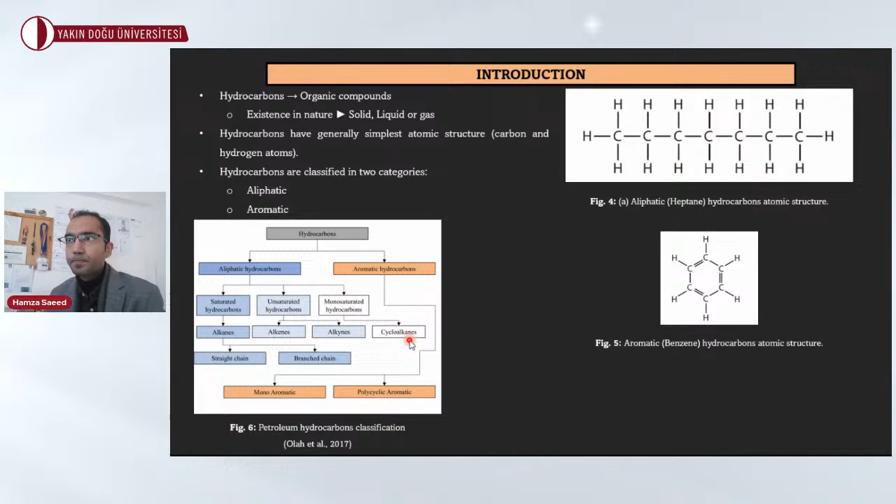So for example, if the clay structure is dispersed, it is converted to the flocculated structure, and also if the clay is in flocculation, it can be converted into a dispersed state. So this is how the hydrocarbons can affect the structure of the, or I should say, the clay matrix of

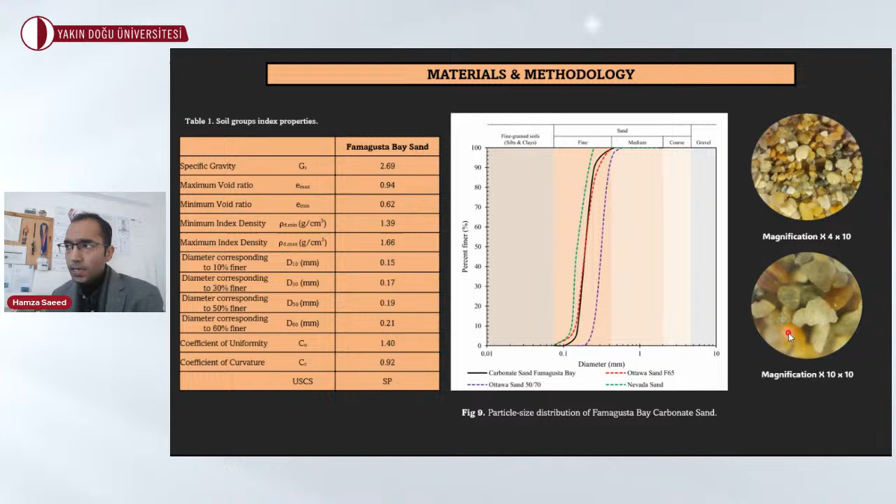occur. So coming towards the materials and the methodology of our experimental investigation, we collected our soil samples from the Famagusta Bay. So here is the particle size distribution curve of the carbonate sand of Famagusta Bay. So the sand has approximately from 0.4 to 0.6 grams in each gram of the sand as a carbonate content. And here is the magnification of the sand particles we have taken from the Famagusta Bay. As we can see, quite a wide range of particle shapes are present in the matrix.

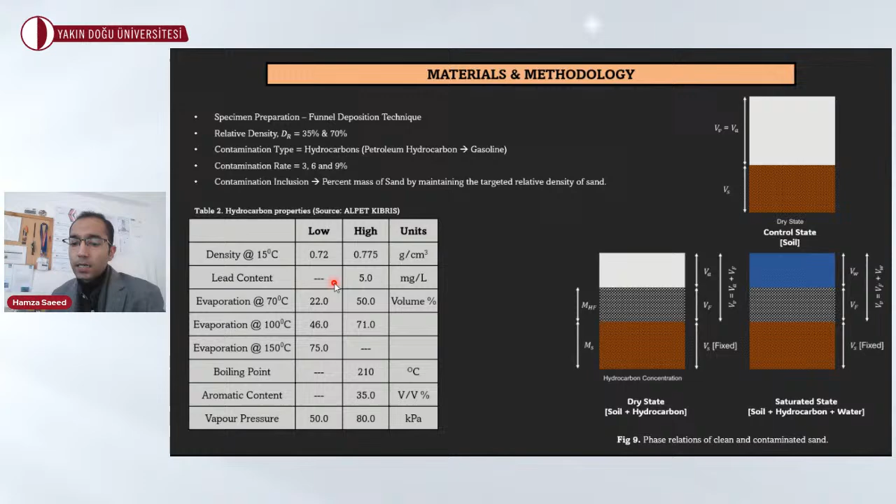So we prepared our specimens in terms of the funnel deposition technique, and we reconstituted our specimens at 35 and 70% relative densities. And we have added the contamination as the petroleum hydrocarbon, which is classified as gasoline, at 3, 6, and 9%. So we have artificially contaminated our carbonate sand, and we have added it in such a way that the targeted relative density is not changed, as we can see in these phase relations of the clean and contaminated sand. And here are the hydrocarbon properties which we have utilized and contaminated our sand with.

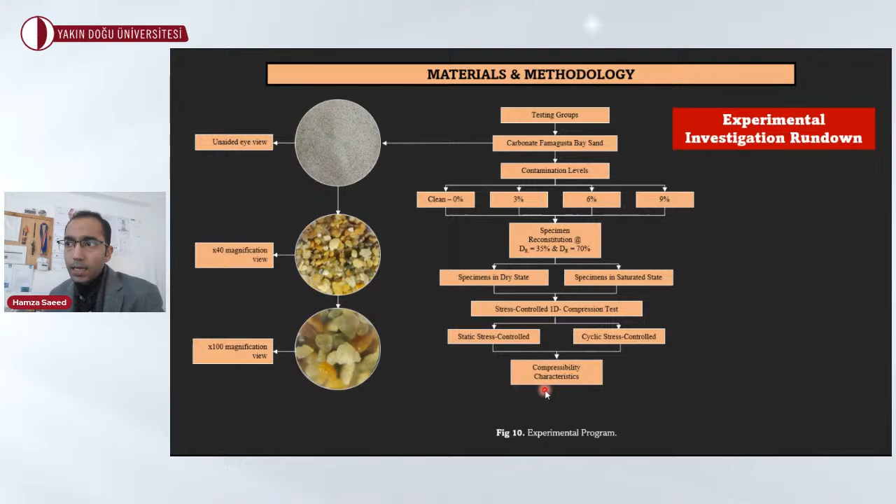So here is the experimental investigation rundown. The contamination levels were set as 3, 6, and 9%. And we tested our specimens in dry and saturated state. The point of focus of this presentation will be the one-dimensional compression test under stress-controlled conditions. We applied static and cyclic loading as well. And at the end, I am going to discuss the compressibility characteristics of this experimental investigation.

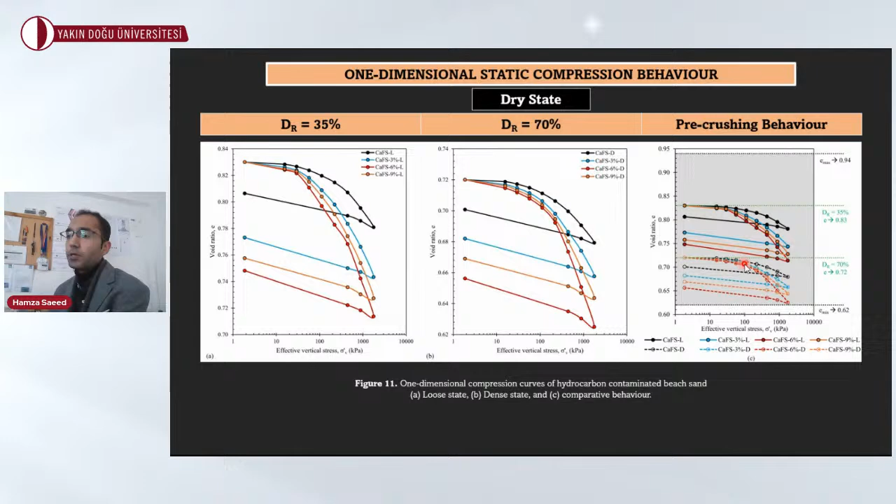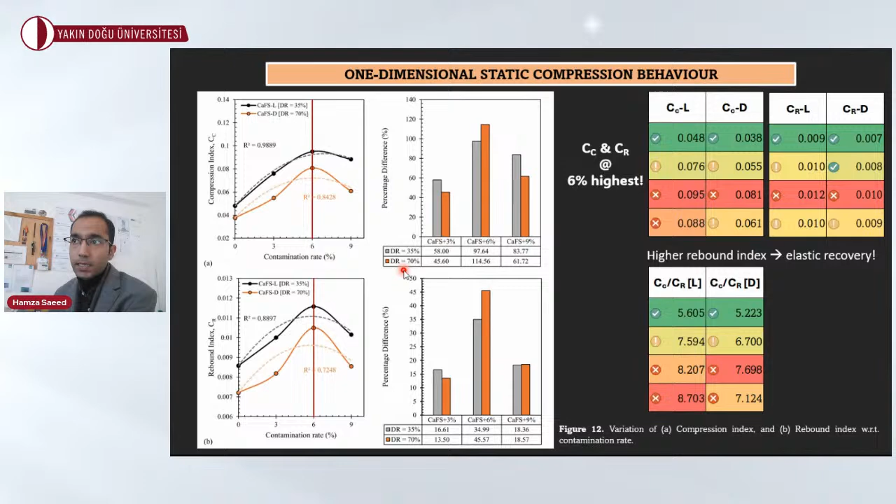So in this case, we can see that at the highest contamination rate at 6%, approximately 98% increase in the compression index was observed. Similarly, 114% was observed in the relative density of 70% in comparison to the clean sand over here.

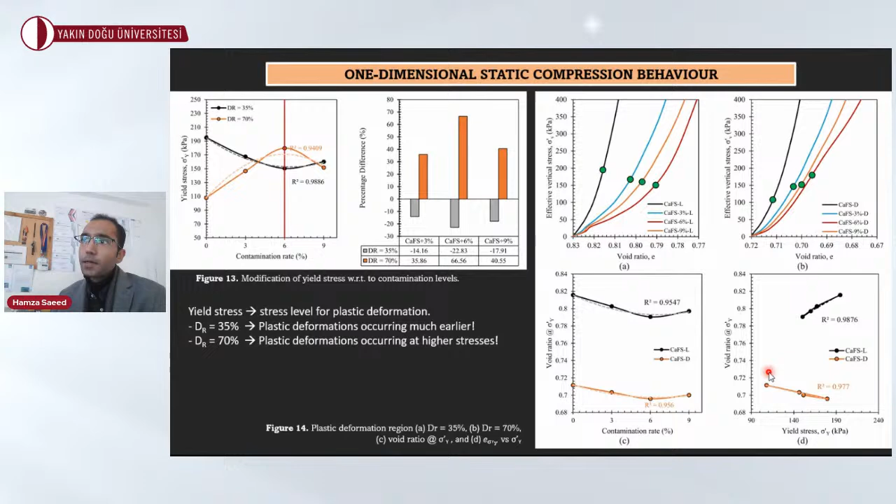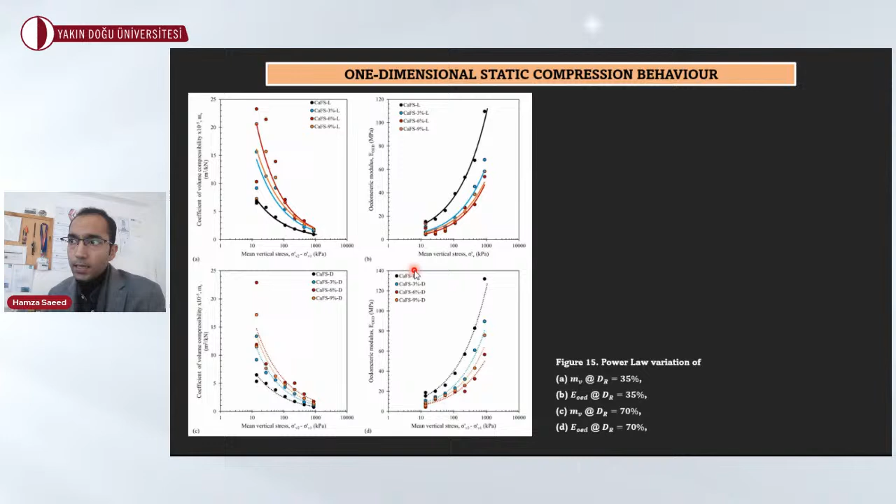And we can see that in comparison, no matter what the state of the soil is, either loose or dense, the 6% contamination rate yielded less stiff soil. In all the cases, it presents a power law variation for both the volume compressibility coefficient and the oedometric modulus. So here are the results for the saturated state, and a similar type of behavior is observed. It means that behavior is generally applicable for the 9% contamination rate, that it will in fact improve the compressibility characteristics a little bit.

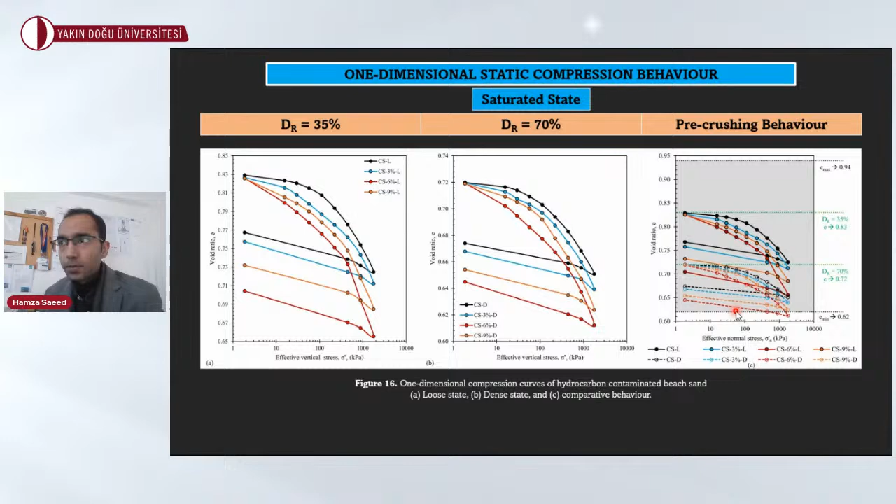But looking at the compression index, there is not much difference between the Cc values of the 6% and the 9%. Again, this is in the range of the index densities. That means the pre-crushing behavior was not observed before and after the test. Similar variations are observed, but in this case, the compression index values have significantly decreased compared with the dry state of the specimens tested.

Nevertheless, in the previous cases, our compression index for the 6% was much higher as compared to the saturated state. For example, in this case, we observed a 35% increase in the compression index as compared to the clean sand. Similarly, for the dense state, a much lower increase in the compression index is observed in comparison with the dry state. So it means that in the dry state, the contaminations are more actively playing their role.

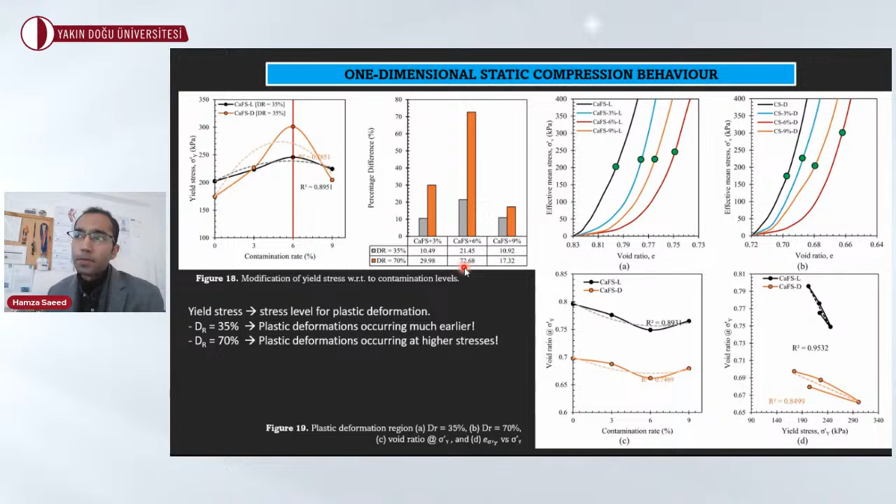Again, similar observations are recorded for the yield stress. If we look into the void ratios at the yield stress points, the plastic deformations are occurring much earlier in comparison to the clean sand. Here the 6% yielded the highest in the dense state again, which is a similar response as compared to the dry state of all the specimens tested.

Interestingly, in the loose state, there's not much difference in terms of the oedometric modulus, the stiffness of the soil, across all the contamination rates, apart from the clean sand, where we can see that all the contamination rates yielded more compressible behavior at low stress levels. So in this case, the hydrocarbons are in fact interacting with the water molecules present in the sand matrix as well.

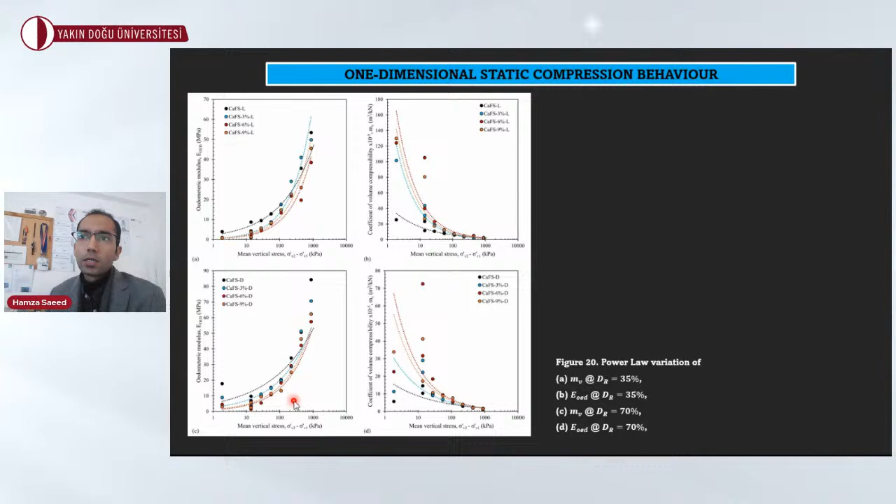Whereas in the dense state, only the 6 and 9% have shown higher compressibility and lower stiffness of the soil matrix. So in fact, when we look into the comparative analysis of both the dry and the saturated state curves, for example, these black lines are representing the dry state and the blue lines are representing the saturated state, we can clearly see that the saturated states have yielded higher compressible behavior.

Why could it be? It is clearly related to the initial settlement upon the inundation process. We can also clearly see that the initial compression behavior is higher as compared to the dry state. So basically here we can take into account the buoyancy effect of the soil matrix. I mean that during the inundation process, the air molecules are basically eliminated within the soil structure, and hence we have much higher compressible behavior in the saturated state.

But interestingly, the shape of the curves also tells us an interesting story. For example, when we compare the clean sand with the 6% and 9% contamination rate, it's a trilinear curve in the dry state, whereas it's a bilinear curve in the saturated state. So in the dry state, we cannot say that we have 3 different elastic zones. No, in fact, we can clearly investigate here what is happening in the first, second, and third zone.

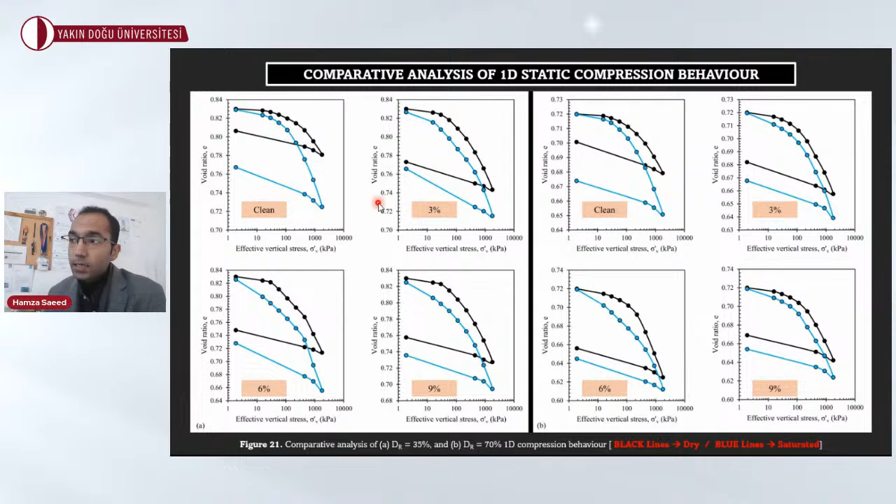So here is the comparative analysis of both the CC and CR values for the dry and saturated state. And as I mentioned earlier, the dry states are yielding a higher compressible behavior in comparison with the saturated state when we talk about the compression index. Similarly, for the rebound index, it is the same behavior, whereas varying response is observed for the dry state. But apart from this, in all the cases, the 6% yielded much higher compressible behavior in comparison to the other soil groups.

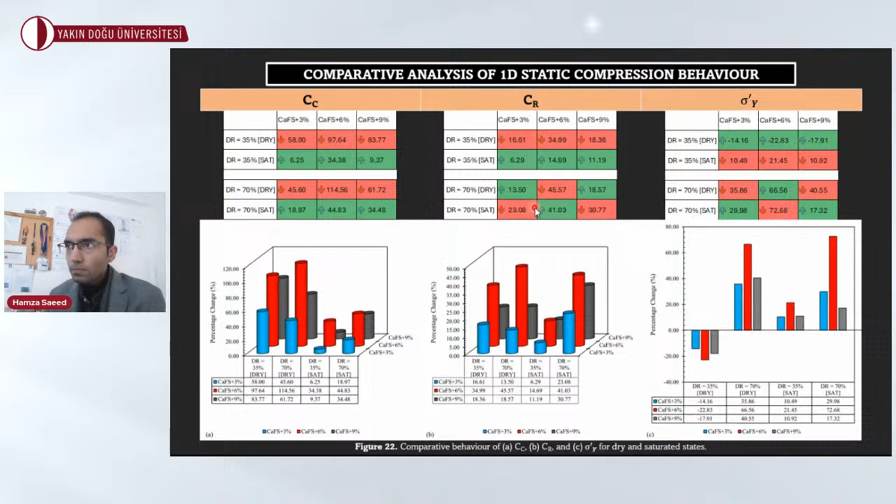So talking about the cyclic behavior or the repeated loading conditions, we can see how the graphs are changing. But interestingly, we can observe that at the end of each cycle, they are approximately the endpoints of the first cycle of each testing group. We have applied in total 5 cycles, and the 6th cycle was applied for validation purposes, as it shows no significant varying behavior in comparison to the 5th cycle.

So here at the 6% contamination rate in the dense state, it has in fact crossed the limiting conditions of the emax and emin range. So it would be interesting to see how the particle shapes look after the tests in this case. Other samples are within this emax and emin zone, so most apparently there will be no crushing of the particles occurring.

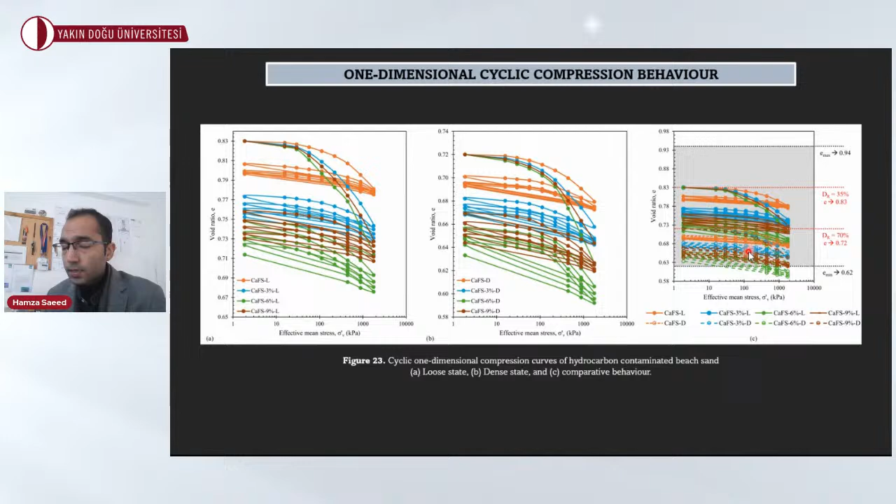So here is the variation of the compression index with the number of cycles. As we can see, with an increase in the number of cycles, the compression index is decreasing, which is the obvious behavior we can interpret because the specimen is densifying with each cycle. And similar behavior can be associated with the rebound index.

But interestingly, for the 6% contamination rate, the rebound index is increasing with an increase in the number of cycles. This can be interpreted in terms of the compressibility behavior which we observed in the previous slides, that the 6% yielded the higher stresses. So if we keep increasing the number of cycles, the specimens are under more stress and more in their limiting conditions, and they elastically rebound after each cycle. So there is a constant variation at 2, 3 and 4 cycles, and at the last cycle, it starts to decrease as well.

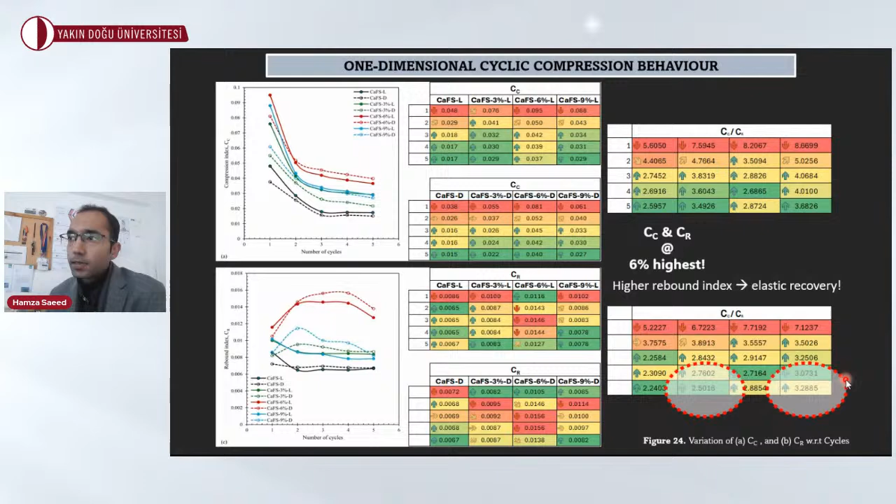So here you can see the compression index to expansion index ratios. Again, at the 6%, these are the highest ones interpreted from these graphs. But the highest elastic recovery we can associate is with the 3% and the 9% in the last 2 cycles, as you can see in this table highlighted.

So here is the variation of the yield stress with the number of cycles. And interestingly, at the first cycle, we have, for instance, for the clean sand, 200 kilopascal of the yield stress. Upon the second cycle, it increased. Now, why in all cases has the yield stress increased in the second cycle? If we look into the graphs of,

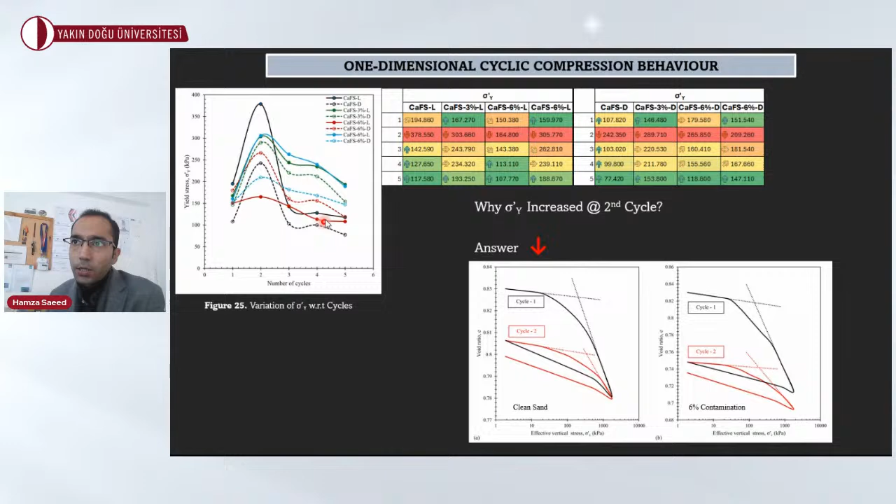for example, the clean sand or any contaminated soil behavior, we can see that although the compression index has reduced, the initial slope is increasing. So that is the possible behavior. That is the interpretation why the yield stresses are in fact increased at the second cycle, whereas at the third, fourth, and fifth cycles they tend to reduce in all the cases. At the end, approximately at the fourth cycle, all the soils are yielding towards the same values of the yield stress.

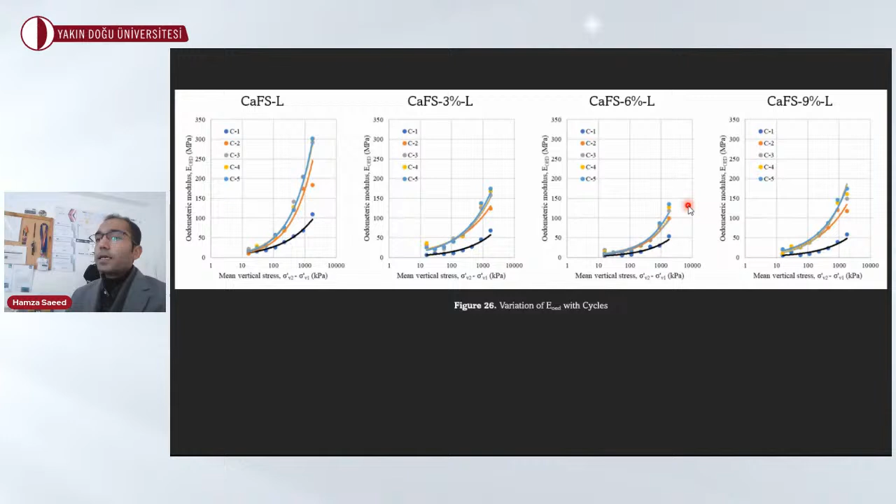So in this slide, this is the variation of the oedometric modulus with cycles. In this comparative behavior, we can see that at the end of the last cycles, or let's say starting from the third cycle, the highest oedometric modulus, but the 6% contamination rate yielded the lowest stiffness in all the cases in comparison. This is probably due to the fact that at 6%, it is more actively playing the role where more and more sliding between the particles is occurring, which is yielding more and more compressible behavior for the 6% contaminated soil.

So I will conclude my presentation with the following points. Our primary aim was to investigate the compressibility characteristics of the beach sand, which we collected from the Famagusta Bay, and it is containing carbonates, and we artificially contaminated our soil with 3, 6, and 9% of petroleum hydrocarbons. And the specimens were reconstituted at 35 and 70% relative densities for both dry and saturated states.

So the key findings of this investigation were that the compressibility was significantly increased with an increase in contamination rate. However, it was reduced at 9%, but nevertheless, this 9% was in between 3 and 6%. And we cannot say that a lot of the hydrocarbons seeped out of the soil matrix. In fact, when we looked at the curves, they are approximately similar to the 6% contamination rate.

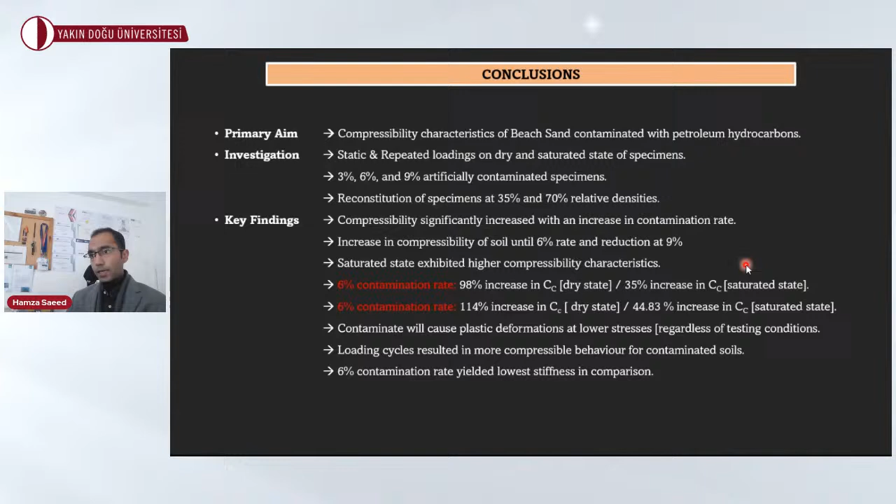And when we look at the cyclic behavior as well, it again yielded more and more compressible behavior, because initially in the first cycle, the hydrocarbons played a more active role, and that's why that behavior was reflected in the second, third, fourth, and other cycles as well. And the final conclusion is that the 6% contamination yielded the lowest stiffness in comparison to the other testing groups.

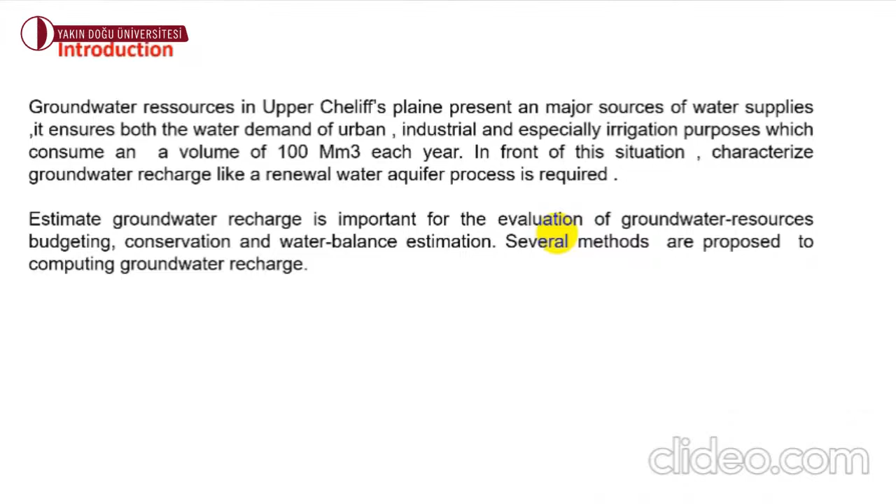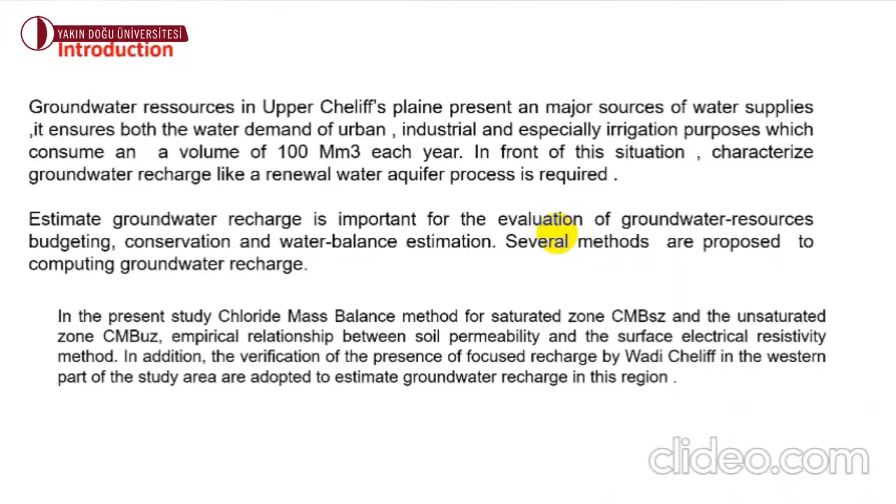Several methods are proposed to compute groundwater recharge. In the present study, chloride mass balance methods for saturated zone and unsaturated zone, and empirical relationship between soil permeability and surface electric resistivity methods are used. In addition, verification of the presence of recharge by Wadi Cheliff in the western part of the study area is adopted to estimate groundwater recharge in this region.

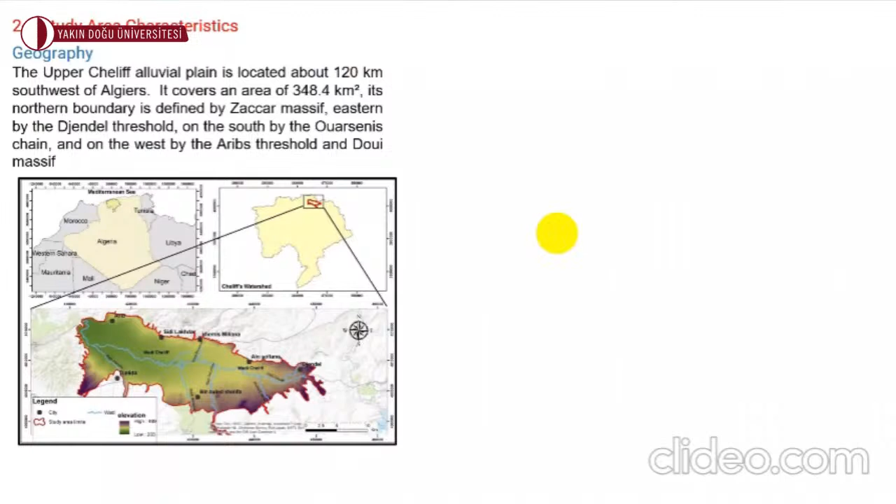Let's start by a presentation of our study area. Geographically, the Upper Cheliff alluvial plain is located about 120 kilometers southwest of Algiers, the capital of Algeria. It covers an area of 348 kilometers square. Its northern border is defined by the Zaccar Massif, the Djendel threshold, in the south by the Ouarsenis chain, and in the west by the Aribs threshold and the Doui massif.

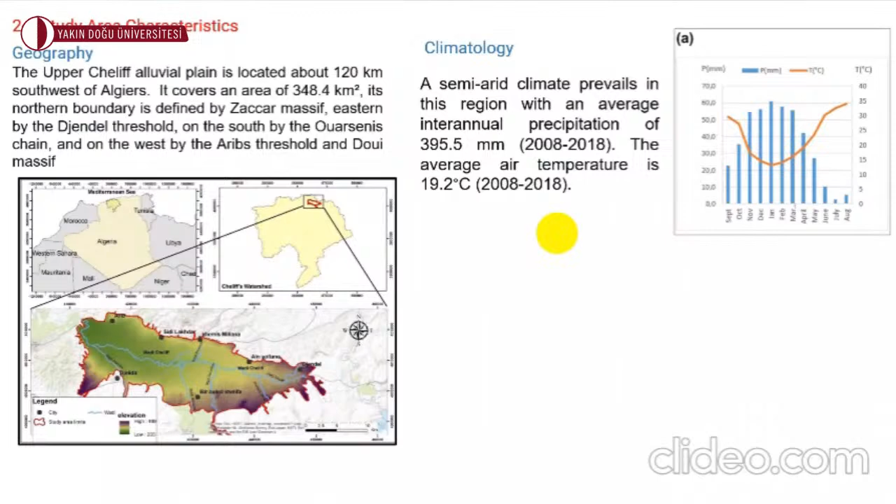From the point of view of climate, a semi-arid climate prevails in this region with an average interannual precipitation of 395 millimeters. The average air temperature is about 19.2°C.

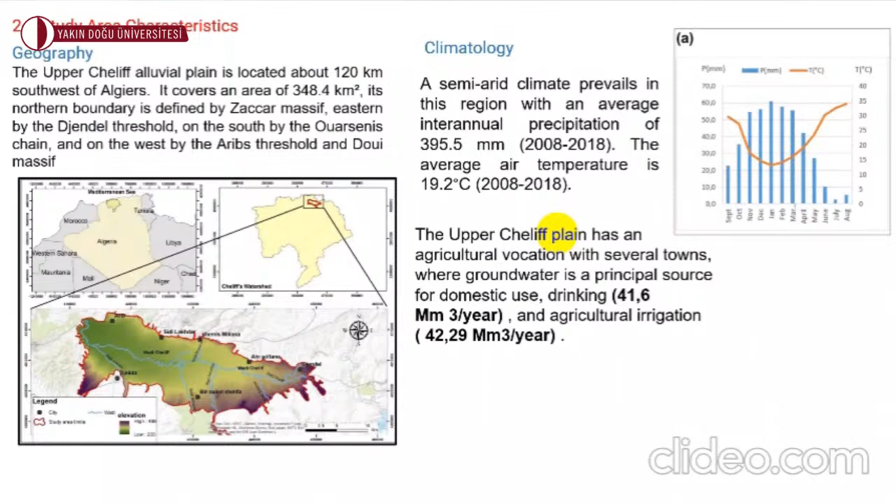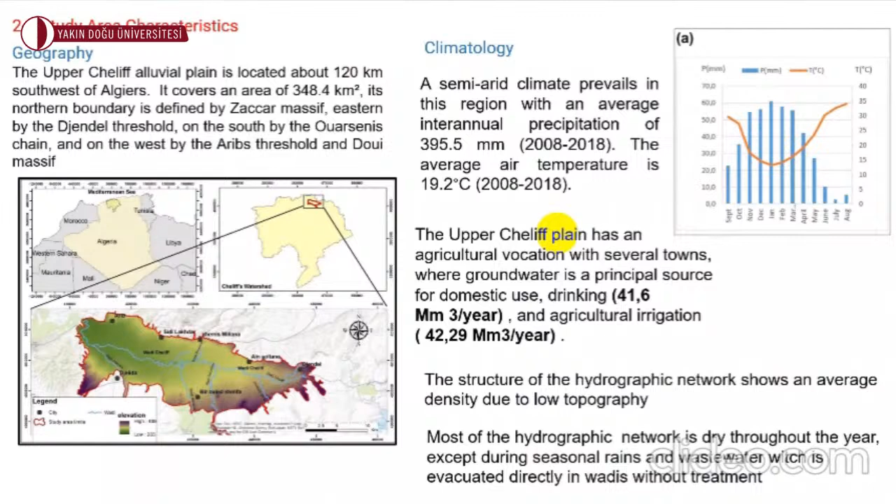The Upper Cheliff plain has an agricultural vocation with several towns where groundwater is the principal source for domestic use, drinking, and agricultural irrigation. The structure of the hydrographic network shows an average density due to the low topography. Most of the hydrographic network is dry throughout the year, except during seasonal rains, and wastewater, which is evacuated directly into the wadis without treatment.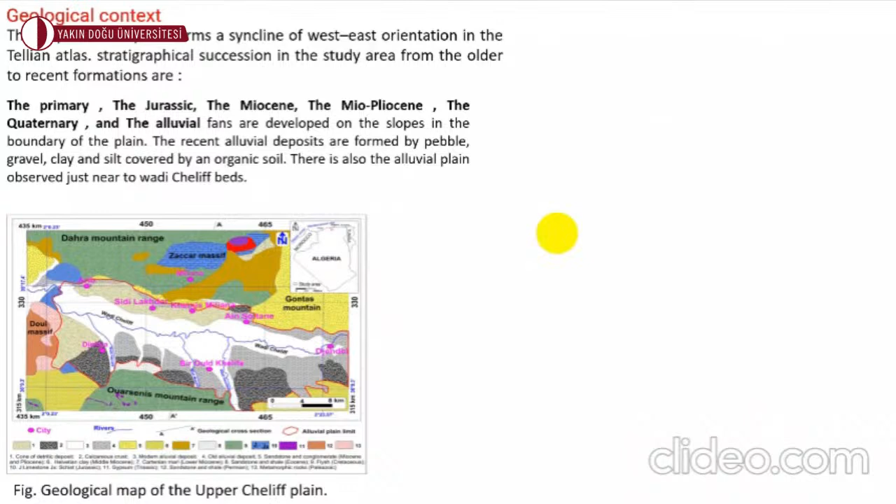Geological context: The Upper Cheliff plain forms a syncline of west-east orientation in the Tellian Atlas. Stratigraphical succession in the study area, from the older to the recent formation, are the primary, the Jurassic, the Miocene, the Mio-Pliocene, the Quaternary, and the alluvial fans, which are developed in the slopes at the boundary of the plain. The recent alluvial deposits are formed by pebble, gravel, clay, and silt, covered by an organic soil. There is also the alluvial plain observed just near the wadi bed.

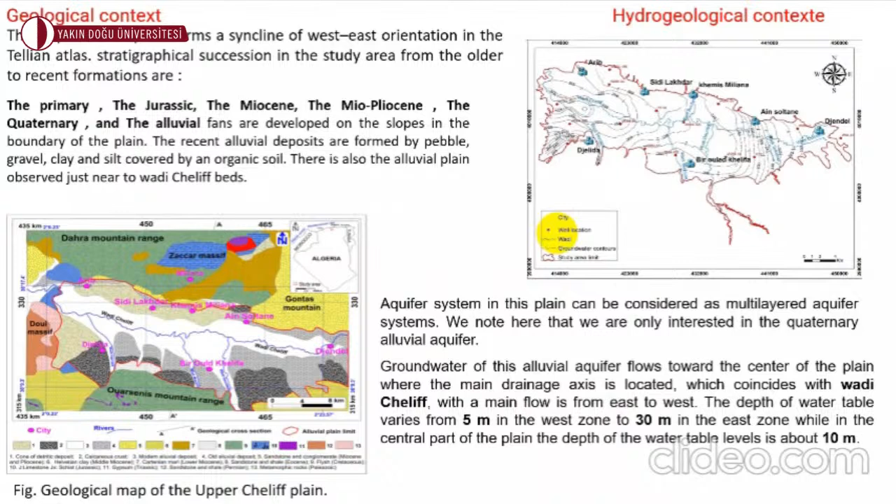The aquifer system in this plain can be considered as a multi-layer aquifer system. We note here that we are only interested in the quaternary alluvial aquifer. Groundwater of this alluvial aquifer flows toward the center of the plain where the main drainage axis is located, which coincides with Wadi Cheliff, shown in blue. So Wadi Cheliff's main flow is from east to west. The depth of the water table is from 5 to 30 meters.

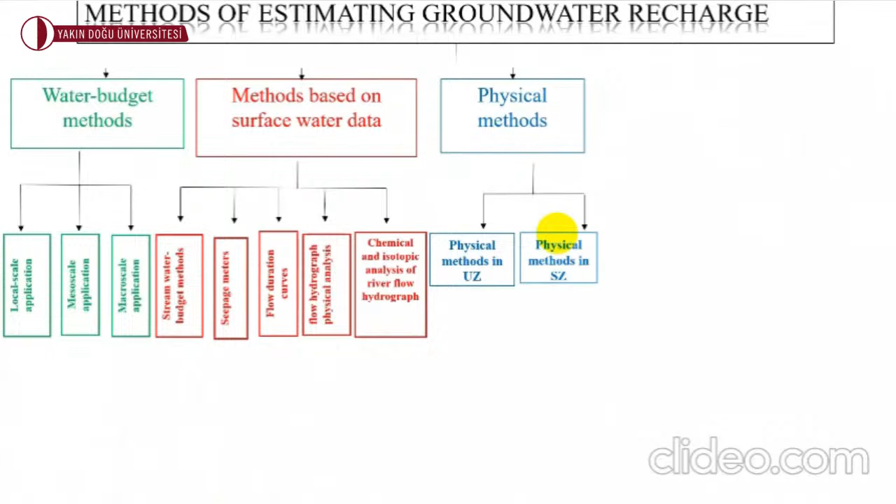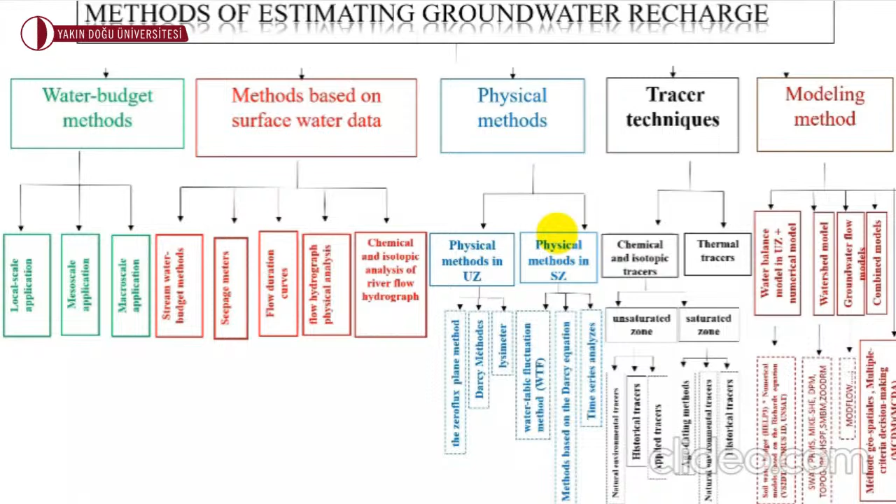So, based on many studies of the subject, groundwater estimation methods can be divided into 5 basic sections: water budget methods based on surface water data; physical methods, which can account for saturated or unsaturated zone; tracer techniques, which can be chemical, isotopic, or thermal tracer; and finally modeling methods, which can be numerical or combined, and so on.

Now we come to discuss how to choose the suitable methods for quantification or for determining and estimating the groundwater recharge. Choice of estimation methods: the characteristics of the study area and the purpose of the recharge study play an important role in the selection of quantification methods, where the objective determines the spatiotemporal scale.

For example, the assessment and management of groundwater resources requires an estimation of recharge rate at a large surface as well as temporal scale, whereas the estimation of the transport of contaminants and the vulnerability of aquifers to contamination requires an assessment at a local and intermediate spatial scale. Also, the nature and availability of data required affects the technique relied upon.

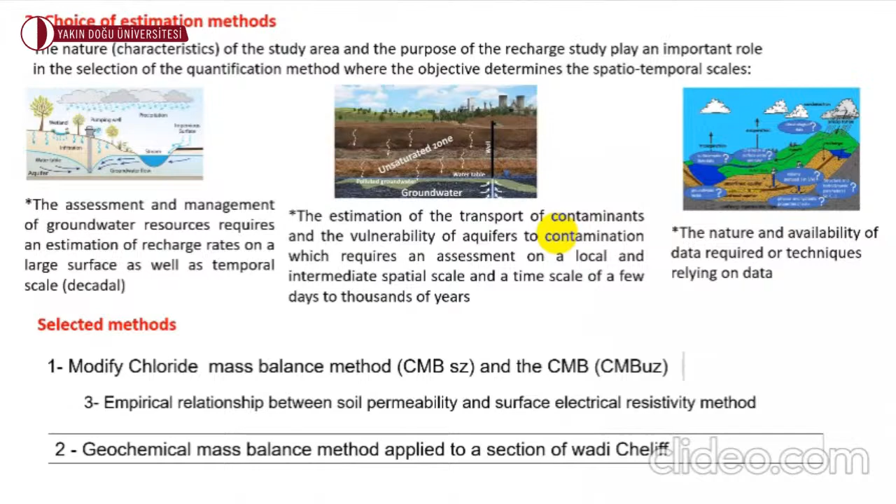According to this criteria, three main methods of groundwater recharge estimation were chosen for our case. Firstly, the modified chloride mass balance method applied for the saturated and unsaturated zone. Secondly, empirical relationship between soil permeability and surface electric resistivity methods. And finally, geochemical mass balance methods applied to a section of Wadi Cheliff.

Let's start with the first method, which is CMB. The CMB method uses chloride anion to calculate the recharge. The chloride anion is derived from both surface water and groundwater and from precipitation. The method was developed by Eriksson in 1969. It's based on the assumption that the only source of chloride anion in the unsaturated zone is precipitation. As few plants can use this anion, the concentration of chloride increases in the soil until the aquifer is reached. The recharge rate therefore decreases as chloride concentration increases.

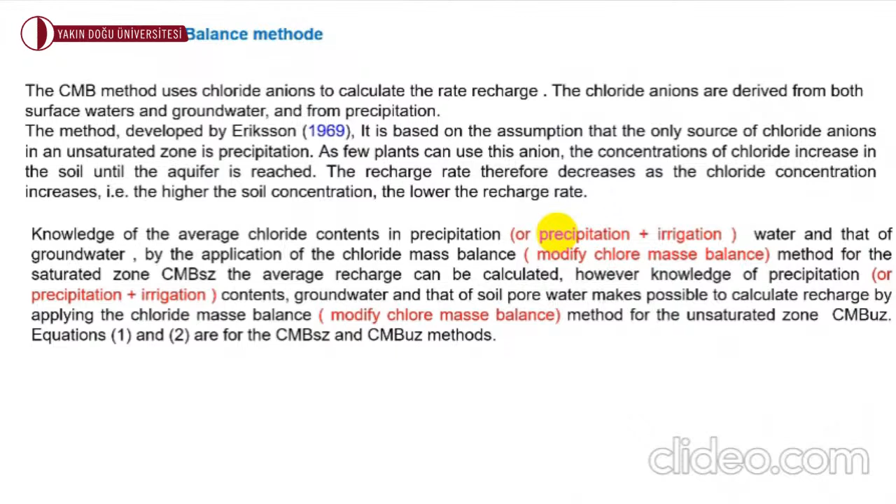So, knowledge of the average chloride contained in precipitation, or in precipitation and irrigation, and that of groundwater, allows the application of the chloride mass balance. So if you know the chloride contained in precipitation and groundwater, we can apply the CMB method, the chloride mass balance.

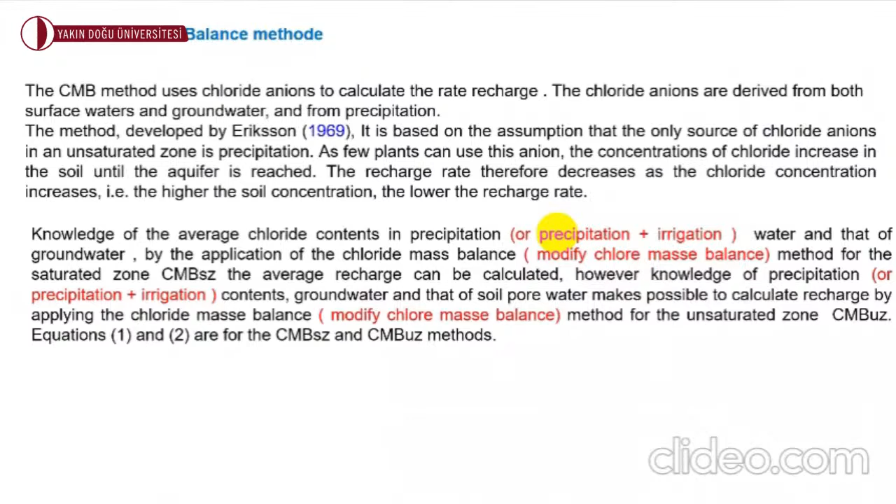If our case or study area is of agricultural vocation, we use the chloride or modified chloride mass balance method. Here we need the chloride content of precipitation and irrigation. Knowledge of precipitation and irrigation content, groundwater, and soil pore water makes it possible to calculate recharge by applying the chloride mass balance or modified chloride mass balance methods, according to the source of chloride. So we can use equations 1 and 2 to calculate the recharge.

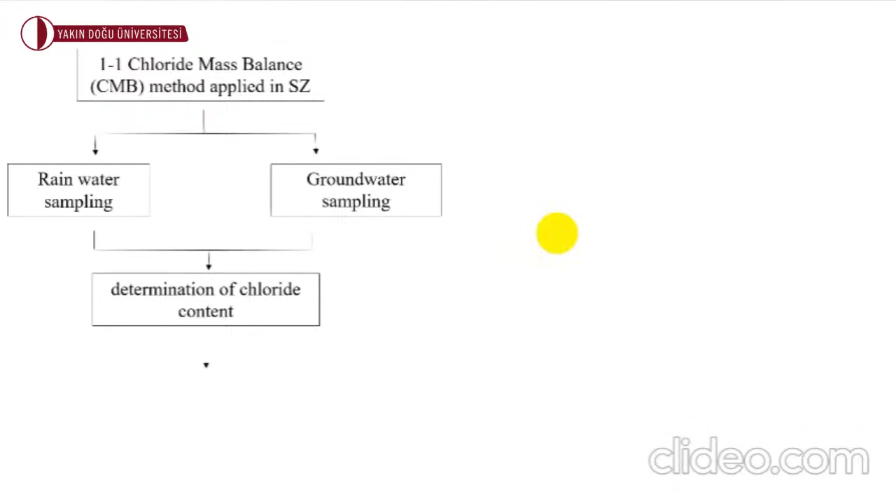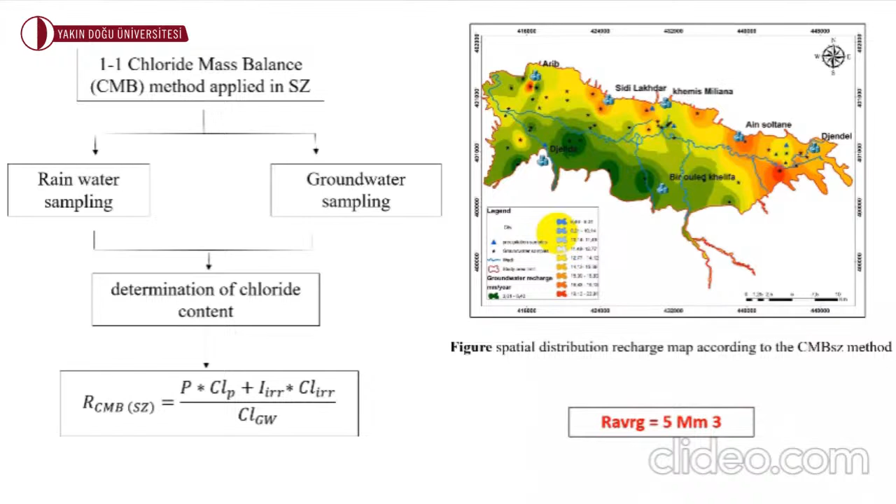There we show a summary of the methodology. For the CMB saturated zone technique, we took samples of rainwater, groundwater, and irrigation water, and used equation 1. Recharge can be calculated for each point, then we use the IDW interpolation technique to establish a map of recharge. The average recharge calculated by this technique is about 5 million cubic meters.

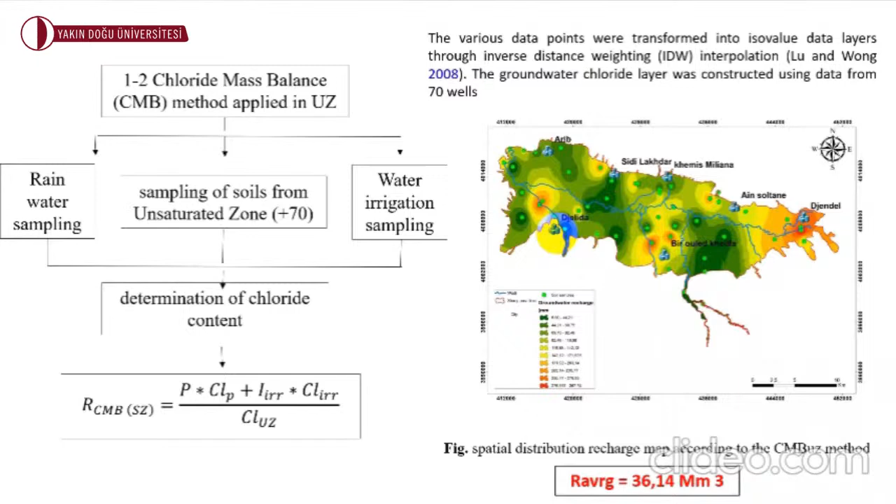By the same procedure, but with the chloride content in groundwater replaced by that of soil pore water, we get the CMB unsaturated zone method, and a map of repartition of recharge can also be established. By this method, the recharge calculated is about 36 million cubic meters. There is a summary of our work from the sampling phase to the determination of chloride concentration.

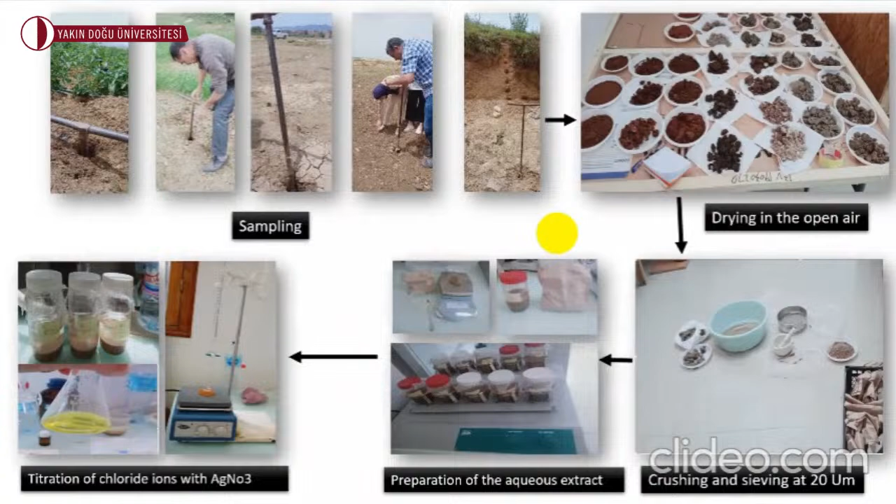Coming now to the second method: groundwater recharge estimation using an empirical relationship between soil permeability and surface electrical resistivity. The recharge rate due to rainfall was estimated using an existing model equation, one of the empirical models of groundwater recharge given by Fitter 2001.

The formula is expressed as recharge equals the annual precipitation multiplied by the open land portion — meaning the area that has not been built on — multiplied by the soil absorption coefficient in percentage. To determine the CR coefficient, which is directly related to permeability of soil, which in turn is related to the resistivity of the same soil, the following steps are followed.

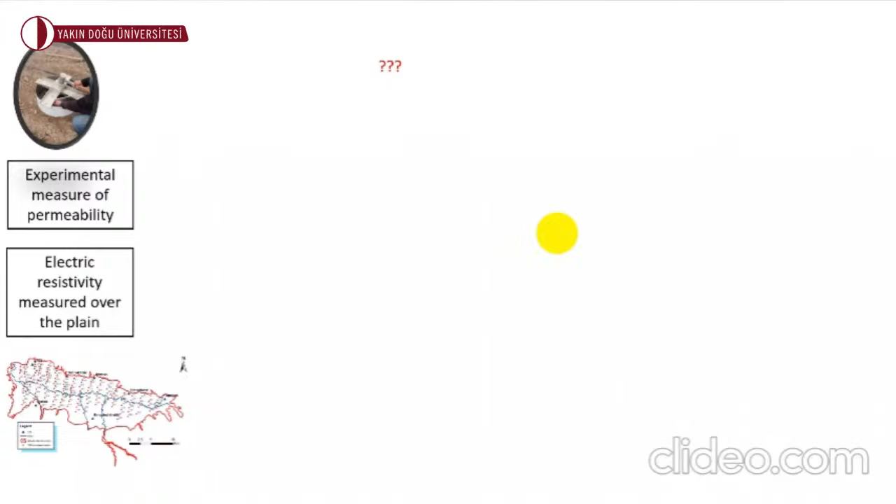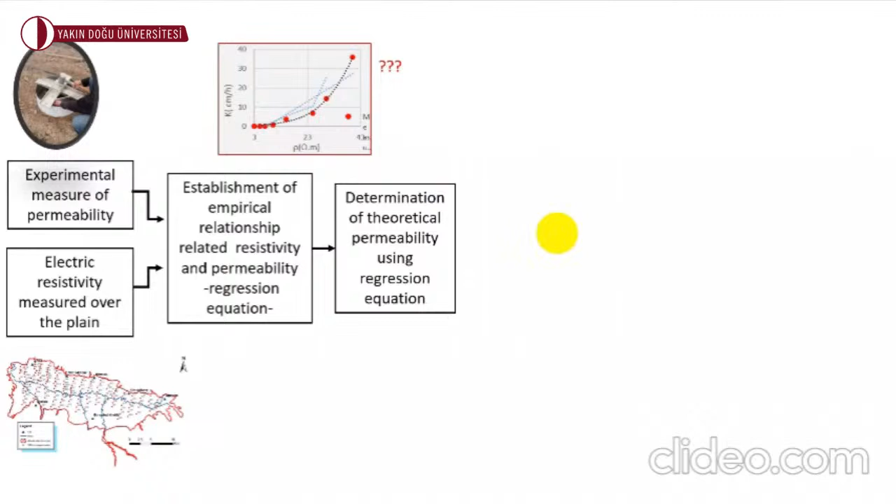Measuring permeability at 8 points of different soil types in the plain by applying the double ring method. Getting the surface soil resistivity measured from vertical electrical sounding methods. Drawing the point cloud of measured permeability versus measured resistivity. Adding the curve correlation and choosing the correct correlation between the two parameters, giving the regression equation and correlation R2. Deriving the permeability from the measured resistivity values using the regression equation.

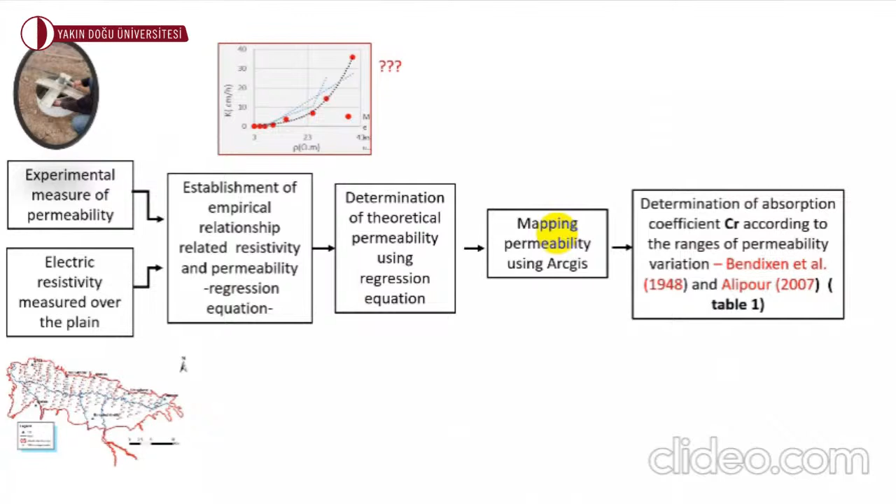Using the description given by Bendixen et al. in 1948, and Alipour 2007, in table 1, to derive the CR coefficient of absorption according to the permeability range using table 1. Once the CR coefficient is determined, CR distribution maps of the plain can be created using ArcGIS, and the recharge can be calculated using equation 3.

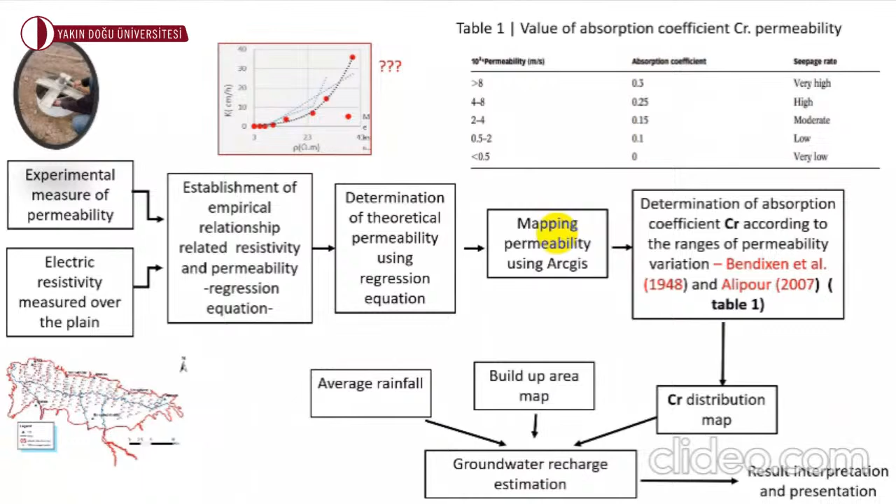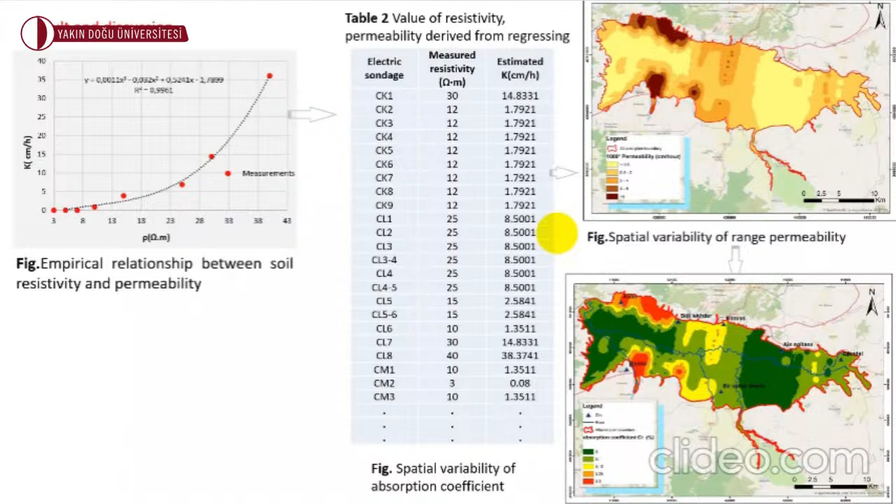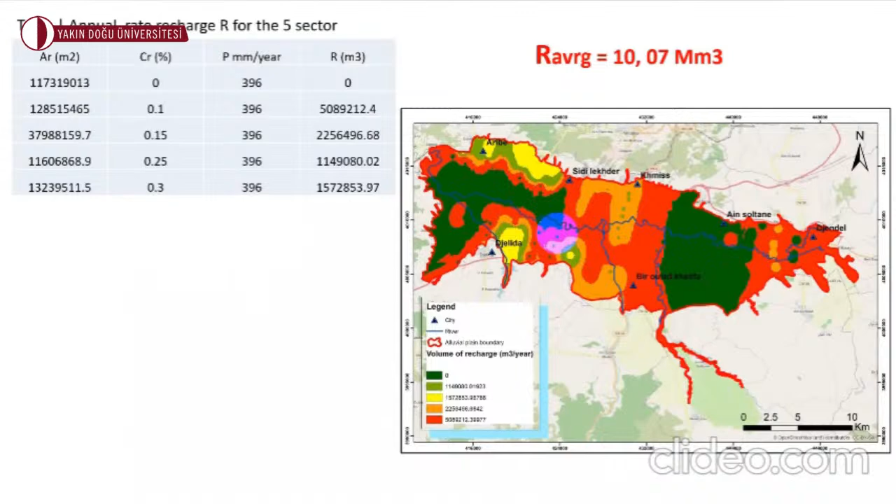So this is our result: the empirical relationship between soil resistivity and permeability, permeability derived according to resistivity, the spatial variation of the range of permeability, and finally the spatial variation of the absorption coefficient. The recharge calculated by equation 3 for every surface is shown. The average recharge calculated by this method is about 10 million cubic meters.

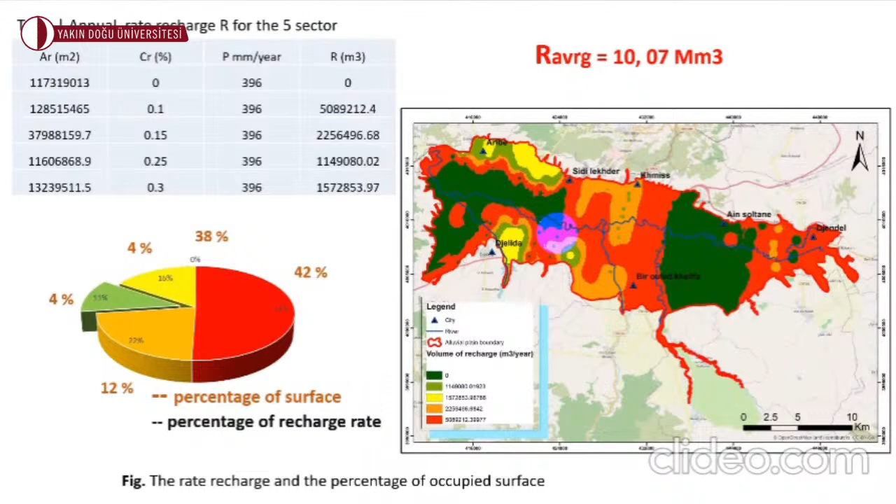The third method is the geochemical mass balance method applied to a section of Wadi Cheliff. The objective is to characterize the hydrogeological and geochemical relationship in the northeastern part of the upper Chéliff alluvial aquifer, and to determine the probabilistic contribution fraction of groundwater recharge by surface water from the Wadi Cheliff section passing through the commune of Djendel.

Mixing proportions of Wadi water, precipitation water, and groundwater were calculated for 5 wells using the natural conservative tracer chloride, introduced into the equation proposed by I. Karlović et al. in 2022. The fraction is in relation with the chloride content of the sampled water.

It means the water of the Wadi sample, the water of the groundwater sampling, as well as chloride in precipitation and chloride in surface water.

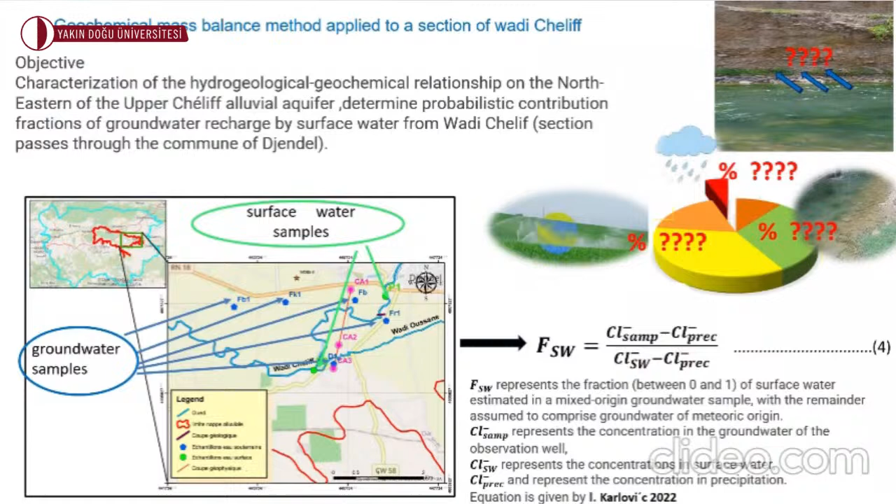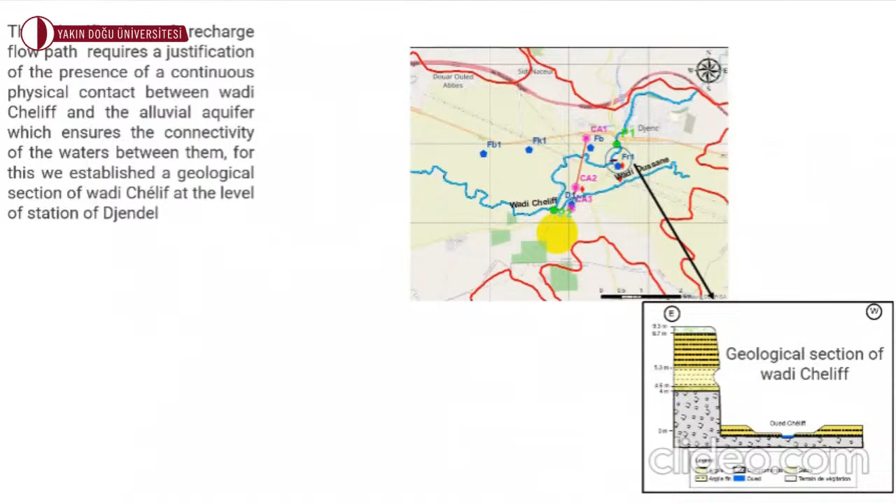The identification of the recharge flow path requires justification of the presence of continuous physical contact between Wadi Cheliff and the alluvial aquifer, which ensures the connectivity of the water between them. For this, we established a geological section of Wadi Cheliff at the level of the station of Djendel. Again, a geophysical section of the region crossing both Wadi Oussane and Wadi Cheliff gave us a view of the formation in depth.

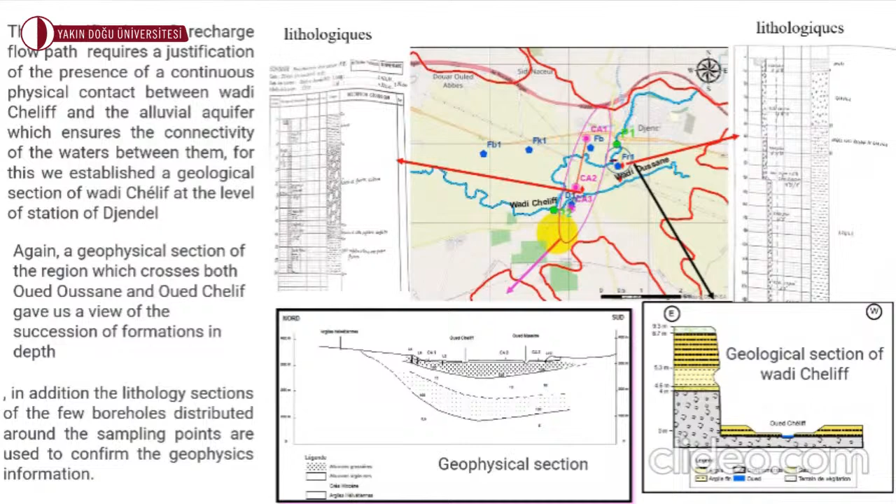In addition, the lithology sections of several boreholes distributed around the sampling points are used to confirm the geophysical information.

Chloride concentration in all samples exceeded the maximum contaminant level, which is 250 milligrams per liter. When the geophysical, geological, and lithological section analysis in the region confirms the presence of a physical environment which ensures the transfer of water from the wadi to kilometers around, the fraction can be calculated.

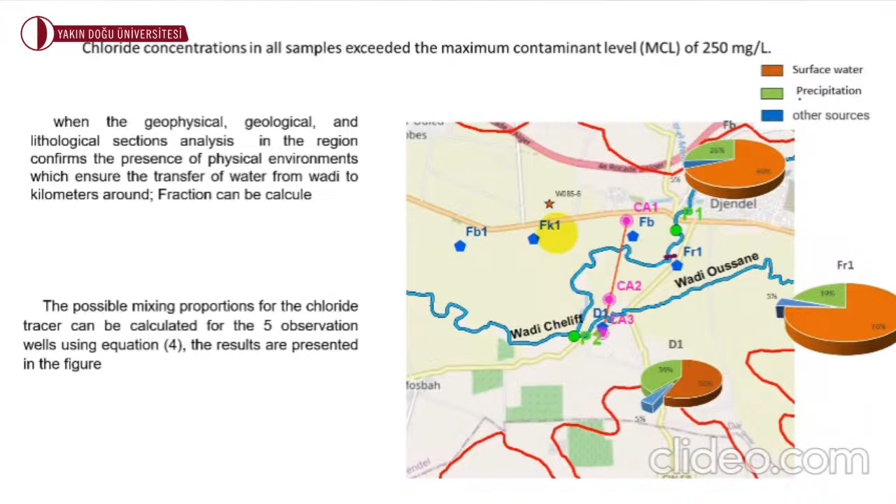The possible mixing proportions for the chloride tracer can be calculated for the 5 observation wells using equation 4, and the results are presented in the figure.

As a conclusion, the application of the CMB method for saturated and unsaturated zones allows an estimation of real diffuse and potential diffuse recharge respectively. The high concentration of Cl in groundwater makes the calculated recharge very low.

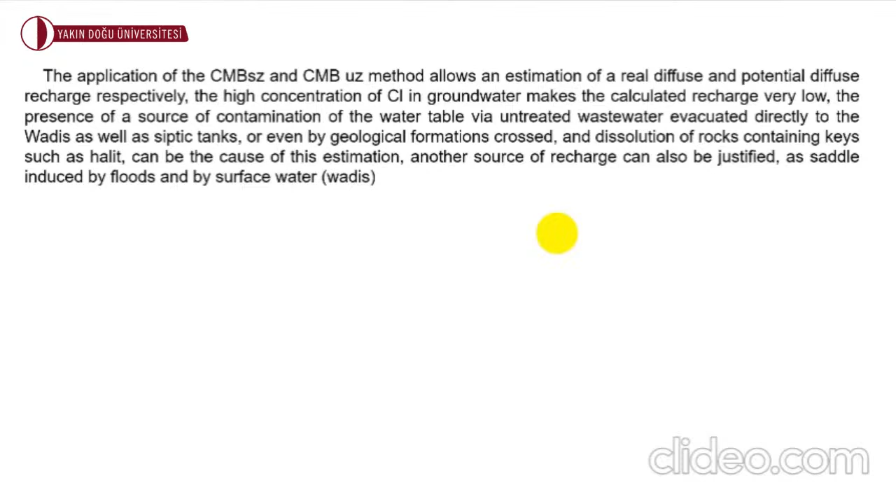The presence of sources or additional sources of contamination of the water table via untreated wastewater evacuated directly in the wadis, as well as septic tanks, or even by geological formations caused by dissolution of rocks containing chloride such as halite, can be the cause of this estimation. Another source of recharge can also be justified as saturated zone influenced by surface water.

Which is the wadis. The second method presented enables quick and low-cost estimation of groundwater recharge rate over a large area and is based on soil resistivity measurement.

A few soil permeability measurements are required to establish an empirical relationship between permeability and resistivity. The permeability is then related to the groundwater recharge rate on the basis of theoretical considerations and annual precipitation data, or different cross-section studies.

The gross groundwater recharge rate in the area, or the average groundwater recharge in the area, is about 10 million cubic meters.

Results of the third method show that surface water is a key source of groundwater recharge in the study area, with contribution rate ranging from 56% to 85%.

The geological and hydrogeological conditions which favor or limit water transfer from the wadis to the aquifer were verified. The last technique has shown that the recharge sources in the wadi effectively...

The results support the theory that an increase in aridity reduces direct recharge and increases indirect recharge, more in terms of total recharge to an aquifer.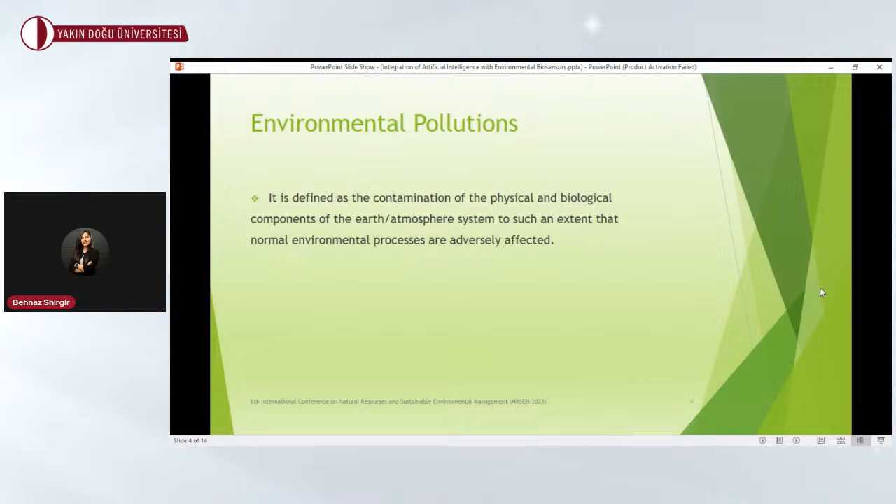We have many types of biosensors, but today we will focus on environmental biosensors, which can detect the contaminants in nature like air, water, and soil. They are sensitive and they can detect contaminants even in trace amounts. The increase in population and the high demand of using technology by humans will cause environmental pollution, which will affect human health and the destruction of the environment. Human activities can cause four types of pollution like air, water, soil, and noise.

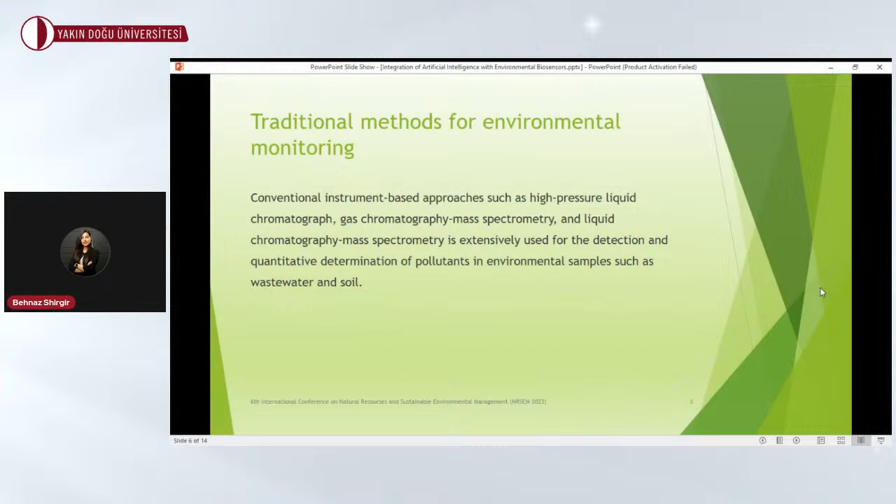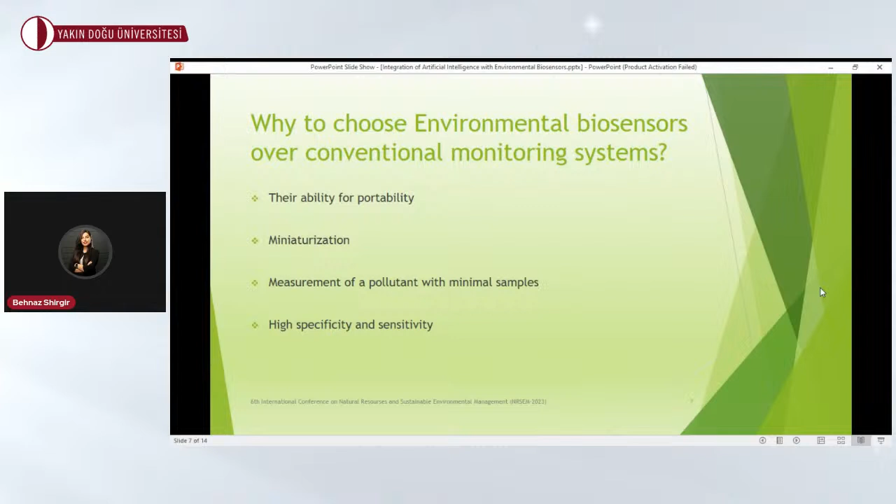Well, in the past, we had some ways to measure the contaminants in nature. They used high-pressure liquid chromatography, gas or liquid chromatography mass spectrometry for detection and determination of pollutants in the environment. However, nowadays we use biosensors, and I discuss some of why we choose biosensors. The most important, we can say, is they have a great ability for portability, and they can measure a pollutant with minimal samples. They have high specificity and also high sensitivity, and the last thing, minimal size.

One of the most promising applications of artificial intelligence in environmental conservation is monitoring environment conditions. Artificial intelligence can analyze large amounts of data from satellites, sensors, and other sources to provide real-time information on environmental conditions. As artificial intelligence becomes more integrated into our lives, it is essential to explore both the positive and negative impacts on our planet. As the world continues to evolve, so does the use of artificial intelligence. While it has the potential to revolutionize industry and change the way we live, it also has an impact on the environment.

Let's start with the positive impacts. Artificial intelligence can be used to optimize energy consumption, making buildings and homes more energy efficient. It can also be used to monitor and reduce waste and to optimize transportation and logistics, reducing carbon emissions. Furthermore, it can be used to improve the way we generate energy by analyzing large amounts of data, and can help us better understand weather patterns, optimize the planning and operation of wind turbines and solar panels, and make our energy systems more efficient, as well as help us better understand and protect the natural world.

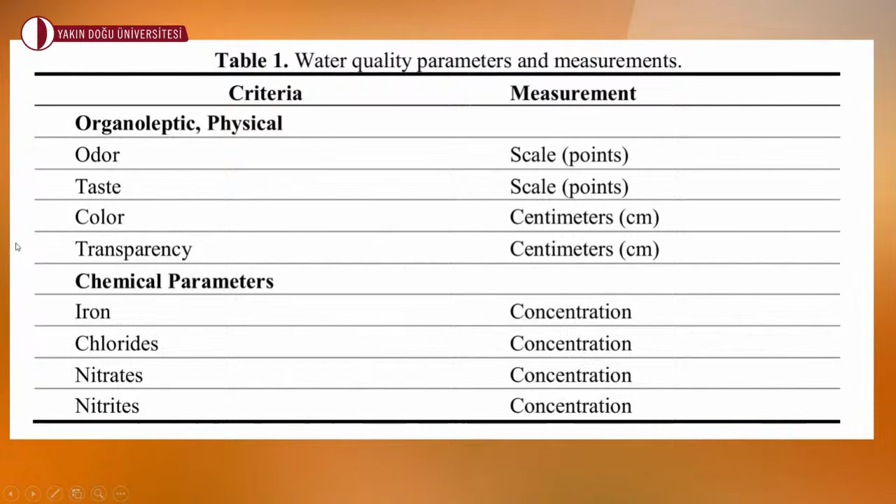The use of freshwater on board the ship: chemical reagents for water treatment in evaporator units ensure long-term prevention of clogging of heat exchange surfaces of these units with scale deposits, and also maintain the purity of the distillate obtained during the desalination of ship seawater and operation on brines with a high salt concentration. The dosage of these reagents is carried out in strict accordance with the instructions developed for each substance, taking into

account its specific application. The choice of reagent for chemical cleaning of a plate heat exchanger depends on the nature and composition of the scale. The successful result of equipment washing and its further operation depends on the precise selection of the reagents. The chemical agents for evaporator cleaning include the components shown in table 2.

Cleaning heat exchangers with acid involves the careful selection of acids as reagents that effectively remove specific scale deposits. Acid cleaning of heat exchangers encompasses a range of reagents, with sulfuric and hydrochloric acid solutions, as well as concentrates or condensates of organic acids like phthalic and citric acids, being the most popular today.

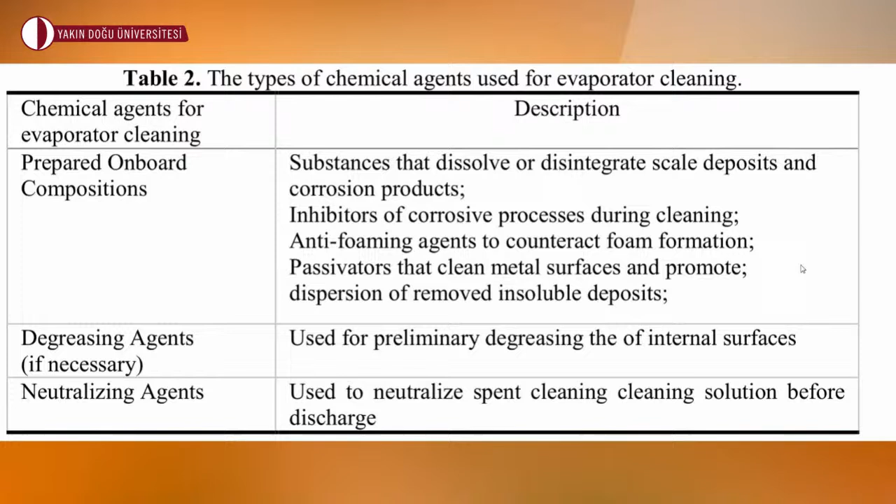While this method is effective, it poses certain risks. The production of hydrogen during acid cleaning creates an explosive mixture when in contact with air. Continuous monitoring of hydrogen levels in the equipment and removal of excess hydrogen are essential during acid cleaning.

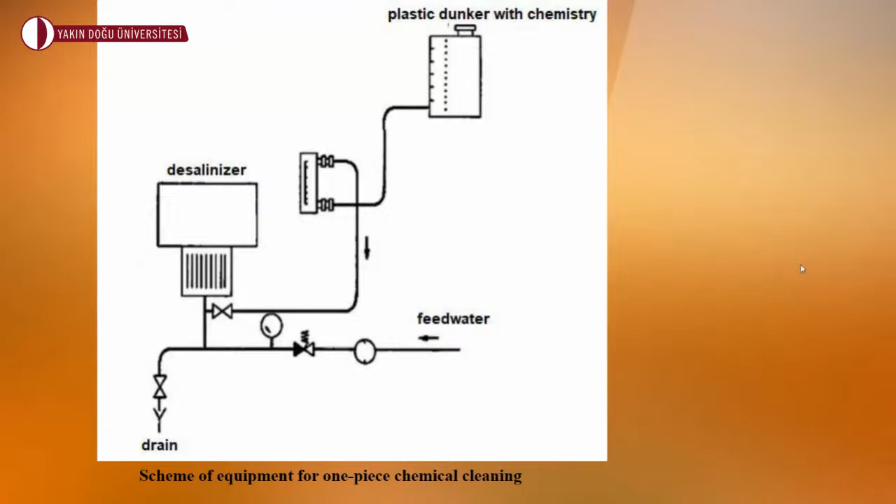Cleaning the plates is carried out inside the heat exchanger using chemical reagents and special equipment. This method is quite economical, productive, and allows maintaining the maximum performance of the heat exchanger and extending its service life. Disassembly chemical flushing of plate heat exchangers involves several stages.

In conclusion, I'd like to say that the chemical cleaning of evaporators and heat exchangers necessitates vigilant monitoring of the cleaning solution's composition. Regular analysis enables timely adjustment, and chemical indicators aid in monitoring the reaction environment. The process strictly adheres to instructions for each chemical agent and the chosen cleaning method.